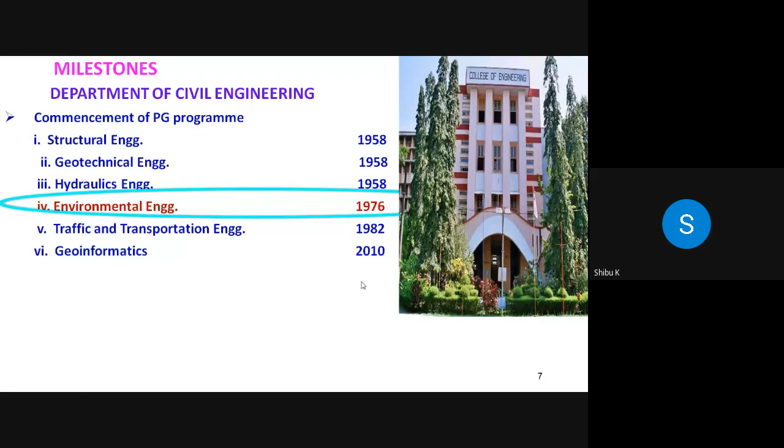These are the specializations we are having, and I belong to the Environmental Engineering stream.

So, preparation for PSC interview. Now let me tell you one thing - you have already proved your merit in the written examination, so maybe 100%, and the personality test or interview carries around 20% weightage.

As far as my knowledge is concerned, this is just a personality test - technical knowledge is already tested. Now what they are trying to do is concentrate maybe on current affairs, and most likely water authority and something related to environmental, mechanical and chemical engineering. It depends upon the subject expert what sort of questions he or she asks. Okay, I hope I am audible, and I am moving on.

So just going through Kerala Public Service Commission - this is Dr. M.R. Baiju, the Chairman of Kerala PSC. I wanted to introduce him because he was from our own college, he was a professor, and he's the chairman. There are 16 members in Kerala PSC.

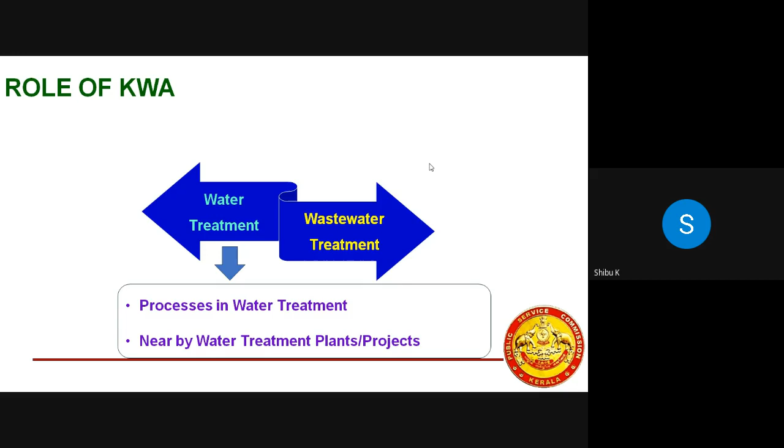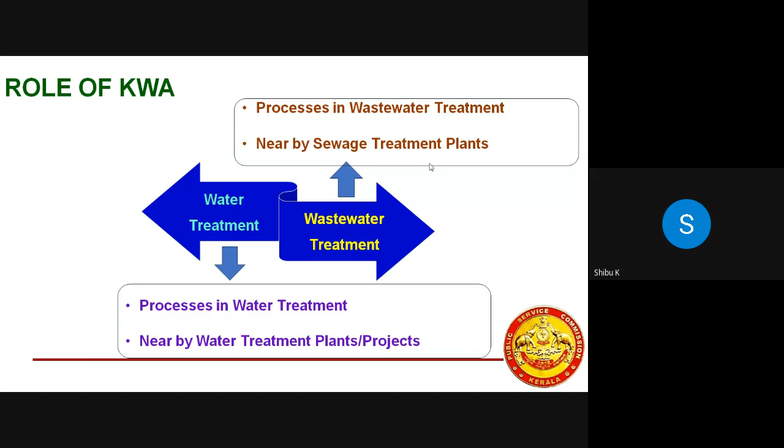Now let me come back. Kerala Water Authority, water treatment, the main processes, the nearby water treatment projects, or the wastewater treatment processes involved, which I will come to later: preliminary, primary, secondary, tertiary, etc., and nearby sewage treatment plants. And if there are any main projects of the water authority nearby, you should know about them, and also some central government projects: Jal Jeevan Mission, or maybe AMRUT. All these things can be a topic of discussion.

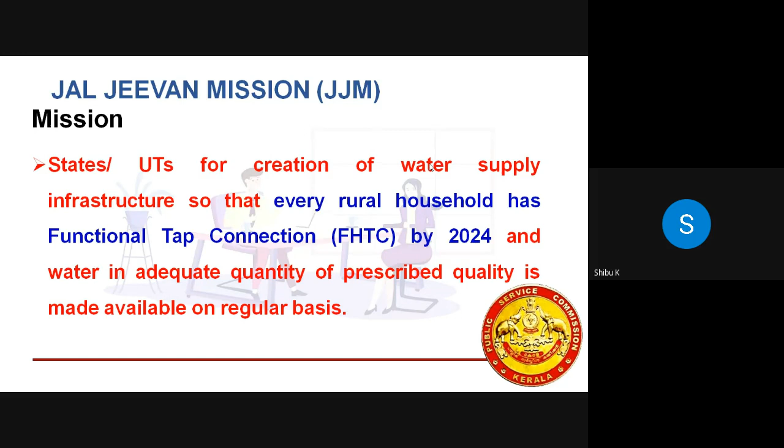So Jal Jeevan Mission: every rural household should have a drinking water supply. That is their vision, and to ensure drinking water on a long-term basis. And their objective is every rural household should have a functional tap connection by 2024. So that way, the mission is working forward. It is regarding water, that's why I included that.

And the AMRUT scheme, or Atal Mission for Rejuvenation and Urban Transformation. It's an initiative by the Government of India for urban areas, to provide basic civic amenities to the urban areas. We all know the basic amenities, roti, kapda, makan; water also comes into that, to improve the quality of life.

That is regarding the AMRUT scheme, and maybe they can ask who is the central minister, Ministry of Jal Shakti, Ministry of Water Resources. We have a couple of ministers of state also. The central minister is Gajendra Singh Shekhawat. Just check the current affairs whether this is correct or not.

Now they can ask you, say you are appearing for the interview for the post of engineer, what is the role of an engineer, especially in Kerala Water Authority? You may be a civil engineer, chemical engineer, or a mechanical engineer. Basically, I am from environment, so I'll be taking one example. So what is the role of an engineer as civil, chemical, mechanical?

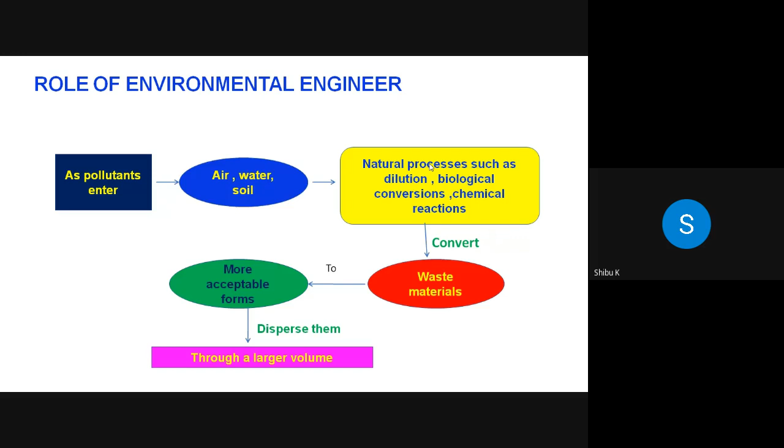If you take an environmental engineer, we know that a lot of pollutants are coming into our planet, either in the atmosphere, the hydrosphere or the lithosphere. Nature has a self-cleansing mechanism, which converts them into waste materials which are more acceptable. Nature itself is dispersing them. But now a huge volume of pollutants is entering, which is beyond the self-cleansing capacity. So can this natural process alone perform the cleanup? No. Treatment facilities are to be designed.

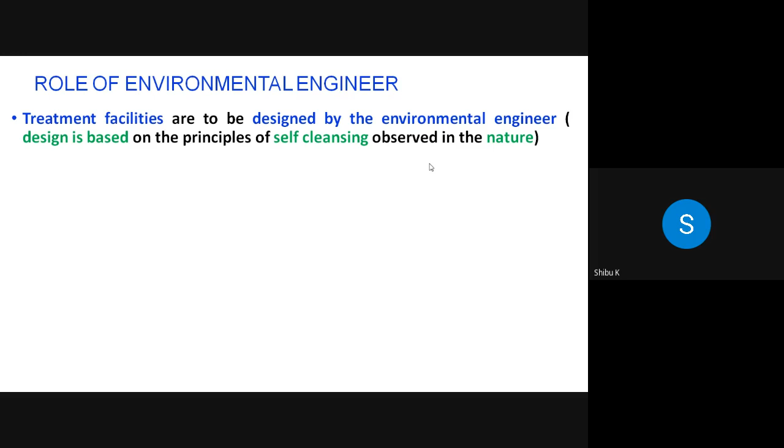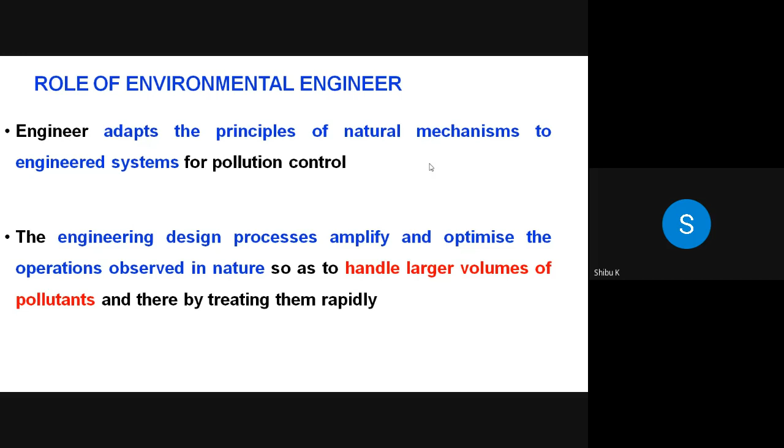So how do the treatment facilities have to be designed? Nature has a beautiful mechanism of converting waste into a less objectionable product, with less impact or less pollution. We take the same principle, but the rate at which these facilities work has to be high, because humans are creating more waste materials, and we cannot rely on the slow self-cleansing mechanism of our planet. That is why the engineer adapts processes for pollution control to handle the larger volume of pollutants.

One example is that we are creating tall stacks, as you can see from the presentation. Why? Because we have to disperse and dilute air pollutants, so by the time they reach the ground, the concentration is less. It is a simple example. Then wastewater treatment facilities, solid waste engineering, landfill. Filtration is the best example, because whenever rain happens, nature takes the water, filters it through sand, and it reaches the groundwater. The same mechanism we have adopted in the water treatment process. We are using a sand bed.

You might have studied about slow sand filter, rapid sand filter, pressure filter. There we take sand, so we are mimicking nature. We are taking all the mechanisms from nature, but the natural filtration rate is too slow. We have to adopt a faster filtration rate. That is why most water treatment plants are using rapid sand filters instead of slow sand filters.

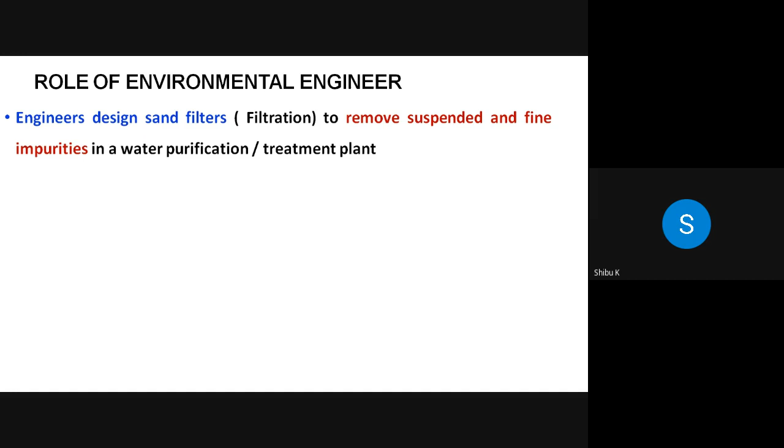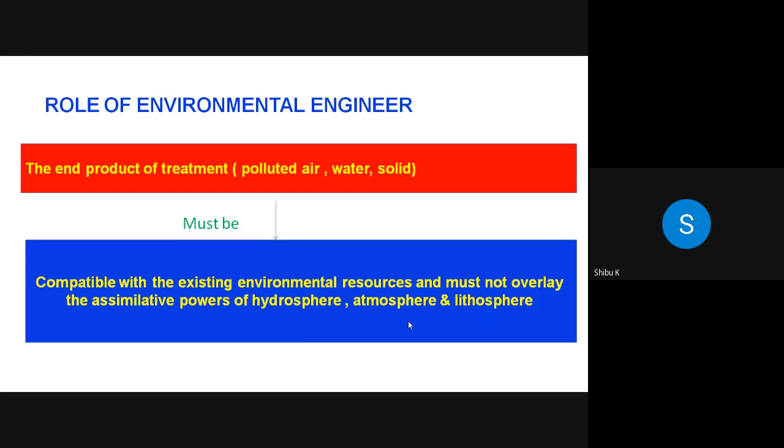So the main objective is to convert an objectionable waste material to a less objectionable form, and the end product should be compatible with the environment. I have already told you about current projects of the Water Authority in your native place. You should know about that.

And if the interview is on a special day, meaning a day of national or international importance, most of the time these PSC members ask, what is so special about today? So I have just added some days with any importance with respect to the environment, or water, or any discipline or field. I have listed a few: World Wetland Day, 2nd February.

You all know wetlands. In connection to wetlands, we have the Ramsar Convention. Wetlands are water bodies or marshy land of international importance. In India, we have around 75 wetlands, and in Kerala, we have 3 wetlands of international importance. These wetlands of international importance are called Ramsar sites.

Sasthamkotta is a Ramsar site in Kerala, in Kollam. Another Ramsar site is Ashtamudi Kayal, and we have Vembanad Kol, which is also a Ramsar site. These are very much required for our ecological restoration.

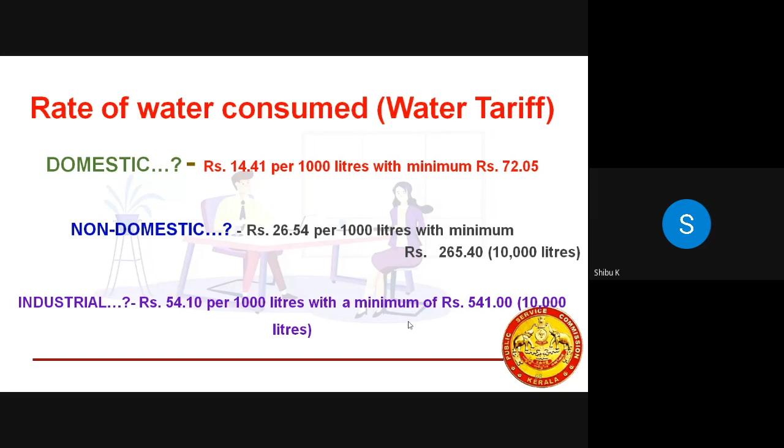Then comes the specification. As we all know, one of the main roles of Kerala Water Authority is to provide potable water. And when it comes to potable water, there is another water quality regarding the quality of water to be used in civil engineering construction. That is clearly mentioned in Indian specification IS 456. So please go through that also.

So the BIS specification regarding drinking water. The code is IS 10500:2012. You can just Google and you will get a PDF. You can go through the limits and all. These I have taken from the code itself.

Earlier, if you go to the textbook, it is physical parameters, chemical impurities, biological impurities, but it is not like that now. It is organoleptic and physical parameters, then substances which are excessive in chemical, and general parameters concerning substances undesirable. So you just go through the codal provision.

And let me tell you one particular thing about this BIS drinking water specification. There are two types of specification: acceptable limit and permissible limit. Acceptable limit means whether this limit can be accepted, and permissible limit means, if there is only one water source and no other water source, you can go up to this. So there are two limits, acceptable and permissible.

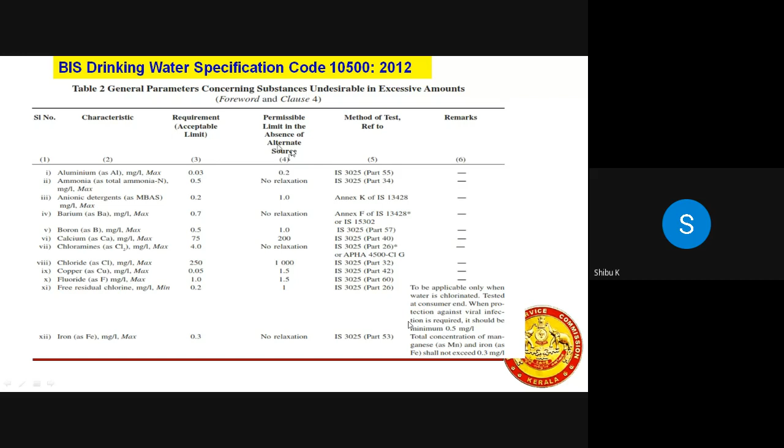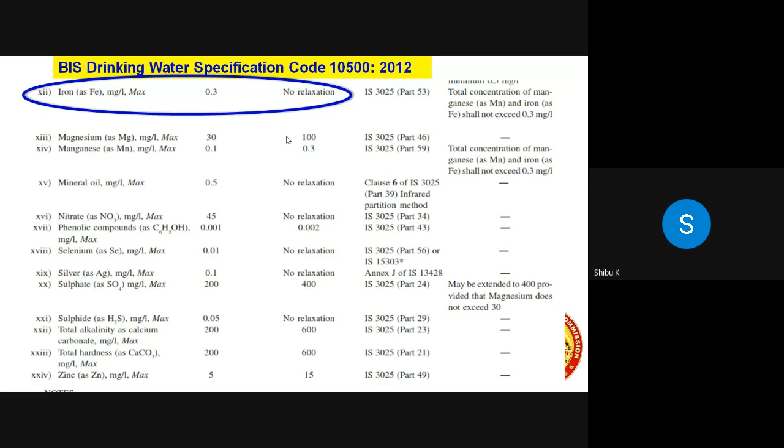Now, if you take the case of iron, it is given that the acceptable limit and permissible limit is 0.3 milligram per liter. As per this code, this is the limit. But I would say that has been changed already. According to the latest amendment, whatever additions or amendments come are automatically added to the existing code. So the acceptable limit and permissible limit is 1 actually.

Last time also I asked this question, and most of the candidates were mentioning it as 0.3, but it is not 0.3, it is 1 milligram per liter. In IS 10500:2012, there is one page: in 2015, it has been amended. So till 2015, it was 0.3, and now it is 1 milligram per liter. These are some tricky questions the subject expert may purposefully ask to check whether you are updated. I have just taken one example, that's all.

Am I audible? കേൾക്കുന്നൊക്കെ ഉണ്ടോ? Yes. കേൾക്കാം സർ, കേൾക്കാം.

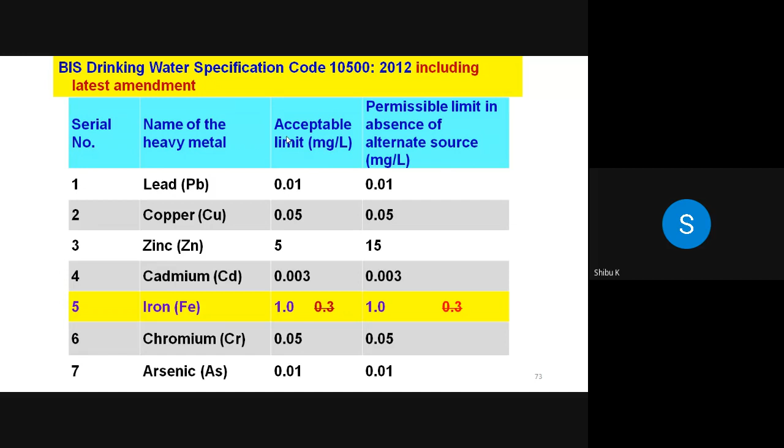Okay, fine. So that's regarding iron. I have just taken one example. When it comes to bacteriological counts, it should be nil in drinking water. Then there are some other IS codes for discharging effluent. Effluent in the sense, whenever wastewater is generated, this wastewater or the sewage can be discharged onto a nearby land, option number 1. Option number 2, onto a nearby water body; most commonly we do that. The third, onto a nearby public drain, and the fourth one is to the sea.

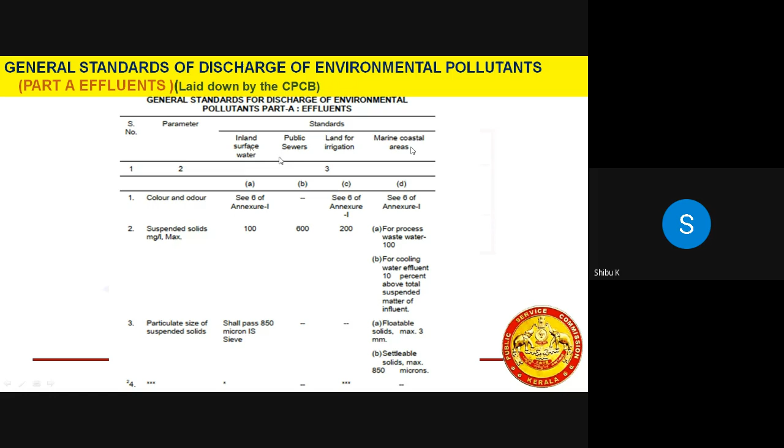So there are some general standards of discharge of pollutants laid down by the Central Pollution Control Board. I will just show you that. Here you can see when the pollutants are discharged onto a nearby water body, which is very common. Public sewer, we have another set of standards. Nearby land, another set of standards. And to the sea, we have another set. So just go through that.

I have just taken the screenshot from the PDF. You can just type in general standards of discharge of environmental pollutants. Part A, Part B, Part C, Part D. Four parts are there, and annexure 1 and annexure 2. I will just scroll through these slides. General standards of discharge of environmental pollutants, Part A, effluents. Four options are there. These are the limits.

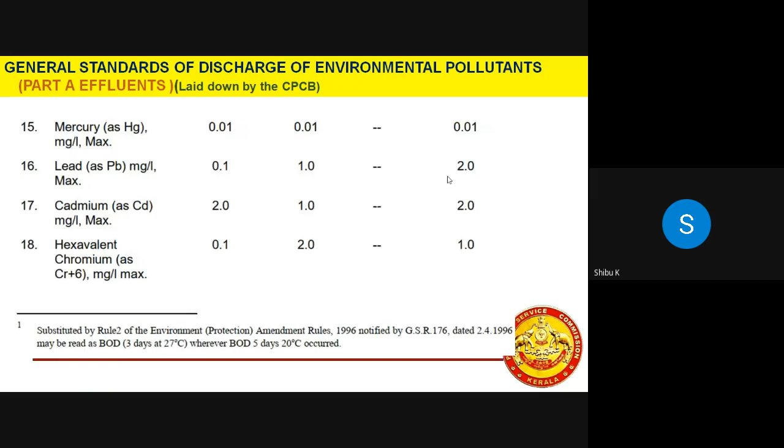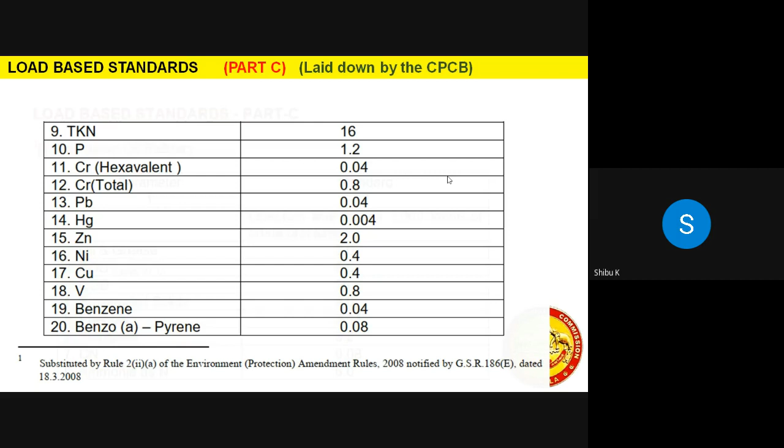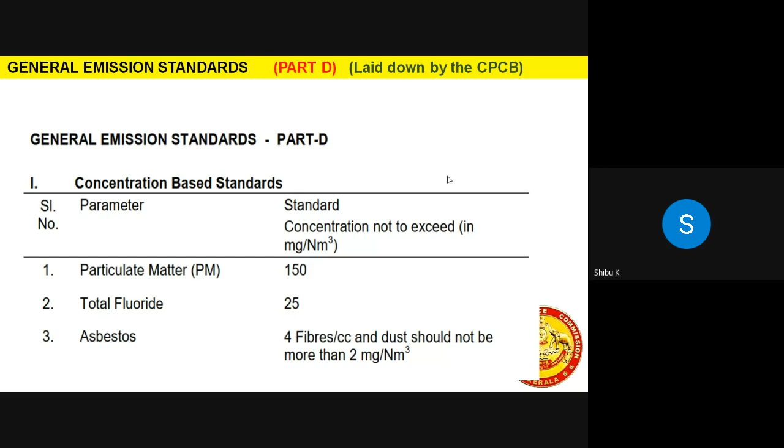Then comes wastewater generation standards, Part B: how much wastewater should be generated if an industry is producing this much finished product. That is also in the same PDF. And load-based standards are there, depending upon the wastewater load that comes in. Then the emission, how much air pollutants are emitted; there also we have general emission standards. Noise standards are also there.

Whenever noise standards are there, it should be specified at what distance the noise testing equipment should measure. What is the decibel for a normal conversation? The unit for measuring noise is decibel, and there are two scales: A scale as well as B scale. Just go through that. You will be able to know the normal decibel for a normal conversation, a jet or an aeroplane that is flying, maybe the threshold of pain for our eardrum. Like that, go through the noise standards.

You can just Google National Ambient Air Quality Standards 2009, NAAQS. The last part will be noise pollution; the first part will be regarding air pollution. And regarding air pollution, air pollution is now measured or expressed in our country in terms of air quality index. There are descriptor words for when the air quality index is between 0 and 50, 51 to 100, 101 to 150, like that it goes. Noise standards are also there. I'll just skip this because these are not necessary.

Now coming to questions related to environmental engineering, I will go on with the basic water treatment process, not in detail, because we have a time limit; before 9 I have to complete this. Wastewater treatment is there. So in environmental engineering, do focus on water treatment and wastewater treatment. Maybe types of pumps used in water supply, types of pipes used in water supply, and the valves used in water supply schemes can be asked.

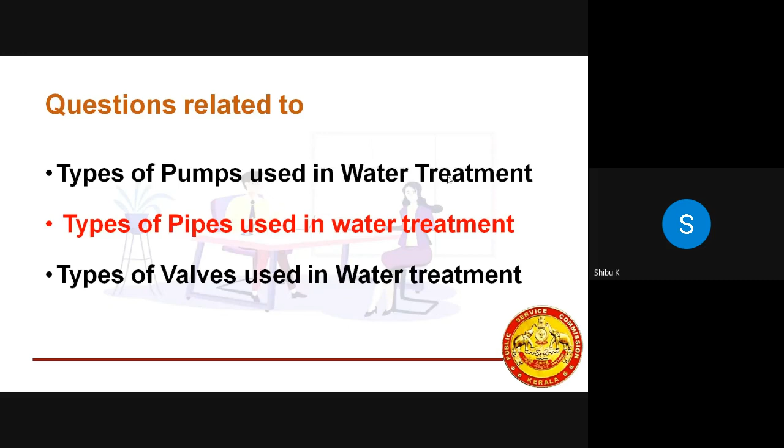When it comes to civil structural engineering, cement: what are the normal grades of cement available? What are the field tests and lab tests for cement? Then coming to concrete, all this depends upon the subject expert, because if I am in the panel, I will focus on environment and something general on civil, mechanical, or chemical. If one from structures comes, maybe 2 or 3 questions can be on structural engineering. So cement, concrete, RCC, PCC.

What is the quality of water that can be used for concrete? That is mentioned in IS 456, especially the limit of chloride content, the pH of water, which should not be acidic, and the silica content and sulfur content in aggregate and water. And what are the normal lab tests for concrete? You have the RCC beam, PCC beam, the cube test, and the mix; I will come to the mix later. Steel: the normal diameter to be used in columns, the minimum cover. Like that, questions related to structures can also be asked.

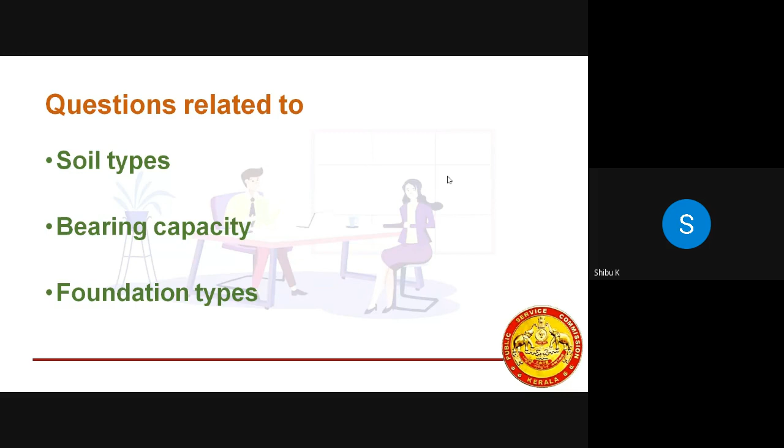Well foundation. Maybe what is so special about machine foundation? Because machine foundation is always something we design to take vibration also. So these types of questions also can be a topic of discussion. Coming to hydraulic structures, maybe our marvelous Idukki Dam. What makes it so special?

Hydraulic structures, aqueduct, the basics of fluid mechanics, Bernoulli's theorem, or maybe conservation of mass, conservation of momentum, or continuity equation. Then topics related to irrigation also can be, all depends. Because suppose I ask a candidate which is your specialization, somebody may say MTech hydraulics engineering, or maybe MTech machine design, or MTech propulsion engineering.

So something related to that, maybe from propulsion engineering, or maybe pollution, which sort of BS norms we are following, Bharat Stage norms. We were following Bharat Stage 4 norms. We skipped Bharat Stage 5 and jumped to Bharat Stage 6. Now what we are following is Bharat Stage 6, I think. So depending upon how you answer, the questions will also come in continuation, in line with the final answer you say.

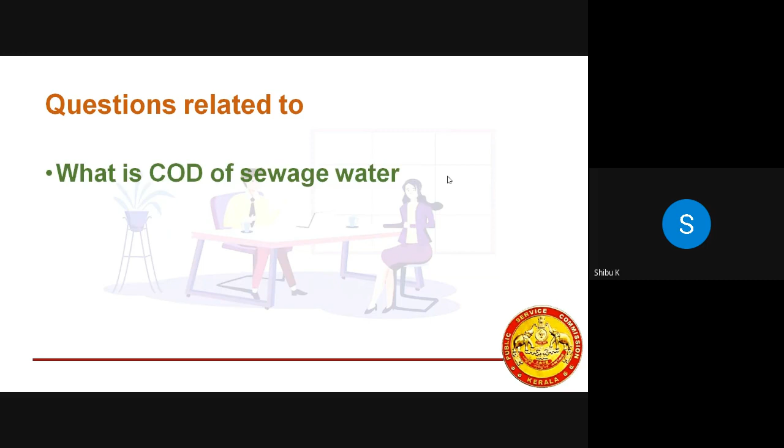What about COD, BOD? Somebody will be expanding BOD as biological oxygen demand, or somebody will be saying it as biochemical oxygen demand. What is the BOD of drinking water? It should be nil. What is the difference between COD and BOD? So like that also things can come.

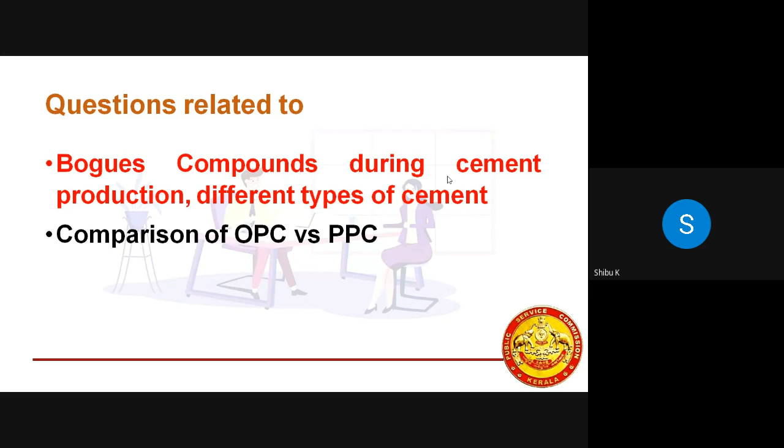Of course, regarding cement concrete, I think Biju sir has already taken the session for you, last month or a couple of months back. Field test of cement, I have already told you. What is the problem in using pumping in concrete works? Then unit weight of cement, or what is the weight of one bag of cement, like that they may ask. Nominal mix. I will just skip this.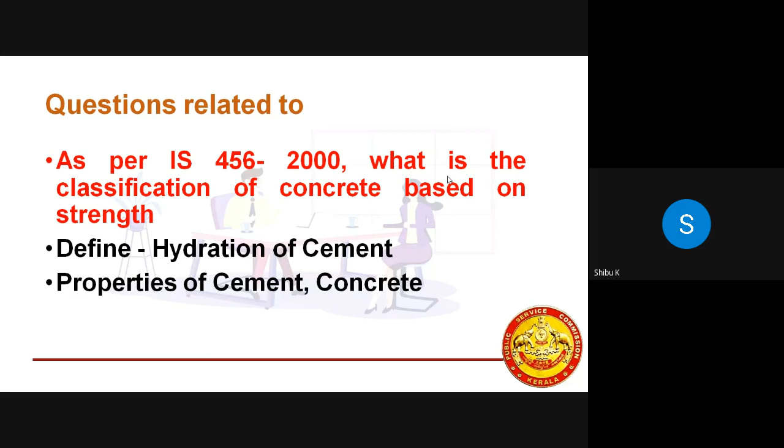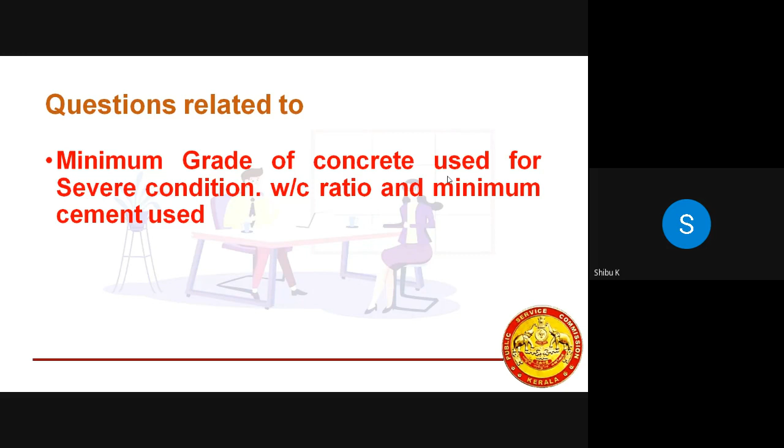These were something which was prepared by, I think, Biju sir. Hydration of cement, Bogue's compounds. Then water cement ratio. Regarding water cement ratio, Abrams' law comes in. Compressive strength and water cement ratio. Area, cube strength, one-way slab, two-way slab. Let's check this. A structural expert may be asking a lot of things like this.

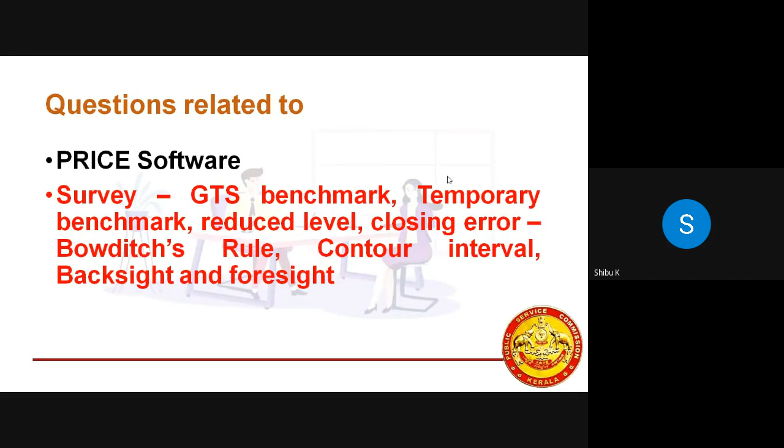Something regarding surveying or price software, which is used for estimation. You just go through, you will get it. Again, what we are following while discussing estimation, we are following the DSR rates, the Delhi Schedule of Rates. The year also should be known to you.

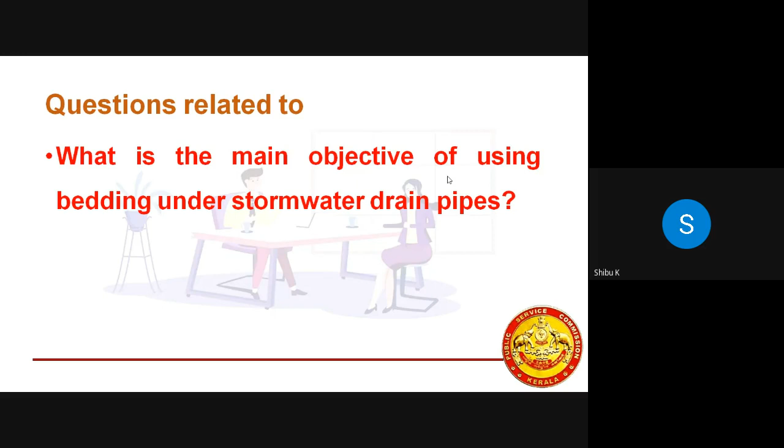Here there is a term known as biomining. So what do you mean by biomining? As per a recent report from Kerala's solid waste management issues, the Kerala government has come up with a report that 34 legacy dump sites are there. That means for years and years, people have been disposing their solid waste there. Till date, we have only one success story in completely converting a legacy dump site into pakka normal land.

That is in Kureepuzha, near the Ramsar site Ashtamudi, where there was a legacy dump site. In Brahmapuram also, biomining was being carried out, but it didn't reach the ultimate stage. Some issues happened in between, so I think they have started biomining again now.

Biomining means whatever solid waste has been accumulated in a particular legacy dump site should be properly treated, and the reusable, recyclable materials should be taken out and disposed of properly. Finally, the rejects, maybe 1 to 2%, also have to be taken care of, and the land has to be completely converted back to its previous state. So that is what biomining is.

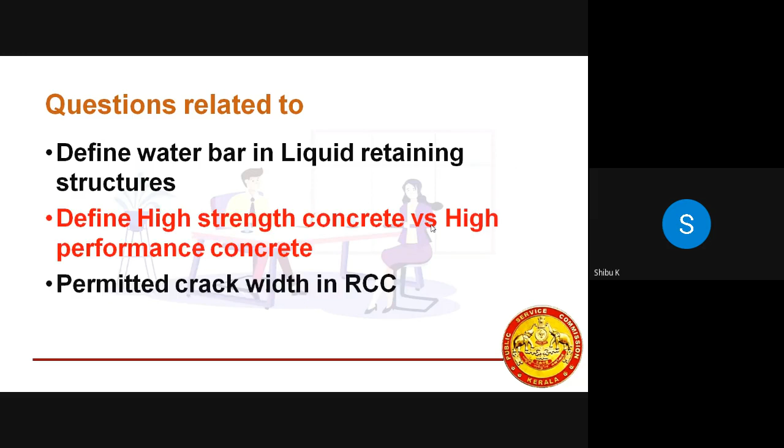And then, just a minute. Let me go to the water treatment processes as well.

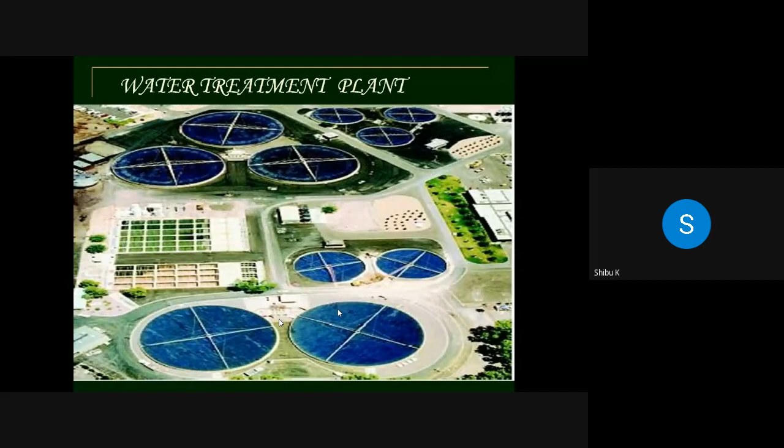Regarding Kerala Water Authority, they are more concentrating on the water treatment system as well as the wastewater treatment system. This is the layout of a typical water supply scheme. There is a source - I come from Kollam, my native place. We have Shasthamkotta Lake, but in Trivandrum we have Aruvikkara.

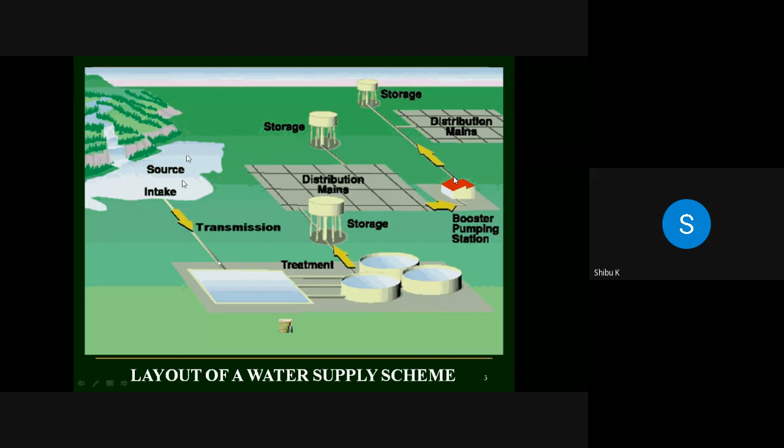So there is an intake structure. It will be taken by means of a transmission system to a water treatment plant. Some process goes on, and after that it will be taken to storage tanks. From there, gravity flow will be there, and it will finally reach the household. Maybe booster pumping stations are required in between.

That is in general. The various water treatment processes involved are: you take the raw water, screening is there - screening means floating matters are removed. Then comes plain sedimentation, which I will explain in the forthcoming slides. So raw water screening, then plain sedimentation, then sedimentation aided with the help of some chemicals - what are the normal chemicals used as coagulants, they may ask.

Then comes filtration, with the help of sand bed, and now new materials are also being tried - anthracite or some sort of material with high filtration capacity is also being tried by the water authority. Then disinfection, aeration, and softening. But in most water treatment plants in Kerala, it all starts from aeration. Aeration removes bad smell, bad odor, and completely oxygenates the water.

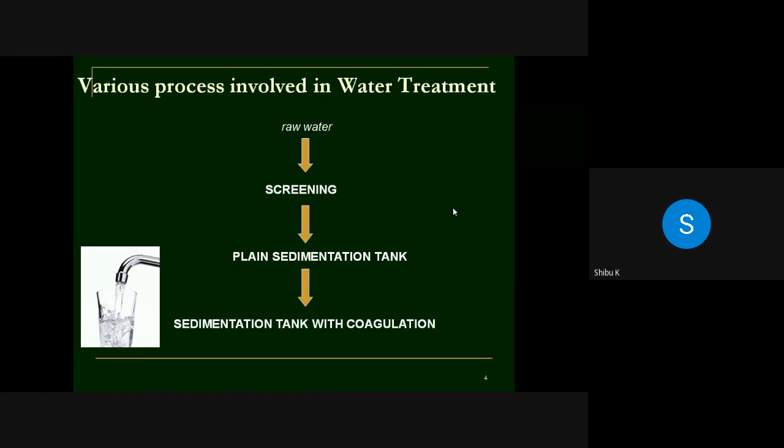In regular treatment process, we say like this: screening, plain sedimentation, sedimentation with coagulation, filtration, disinfection, aeration, softening, and some miscellaneous treatment methods like fluoridation, defluoridation, or liming. Finally, the treated water comes. Miscellaneous treatment methods are fluoridation, removal of color and taste, removal of iron and manganese.

Iron and manganese removal is needed because manganese is usually found in combination with iron, and iron is very common in Kerala. There are some pockets where fluoride concentration is high, especially in Alappuzha and Palakkad. Also, recarbonation, liming, and desalination are miscellaneous methods.

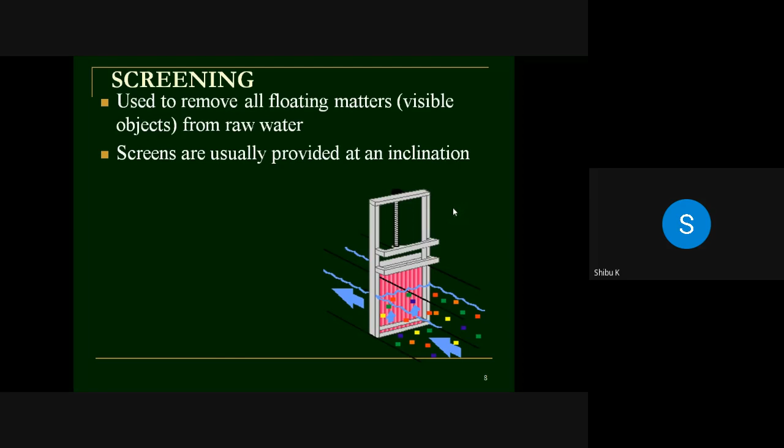Screening, as you can see from the picture, removes floating matter - you can see a bar screen here. Then comes sedimentation - plain sedimentation, then sedimentation with coagulation. Plain sedimentation means under gravity, particles whose specific gravity is greater than 1 settle down. Specific gravity of water is 1, so particles with specific gravity greater than 1, especially inorganic particles, get removed.

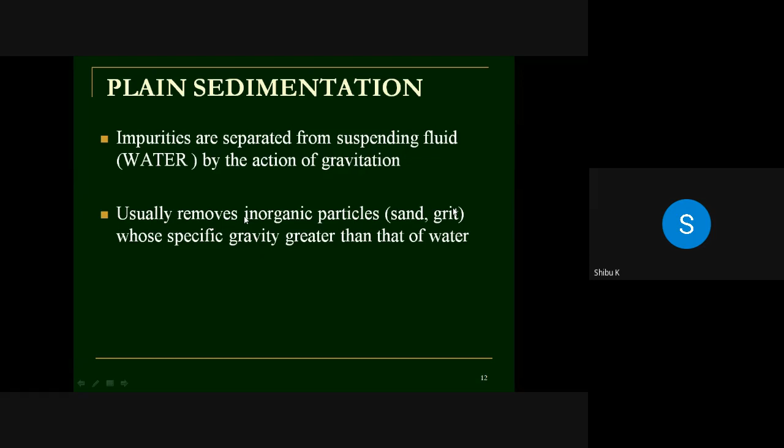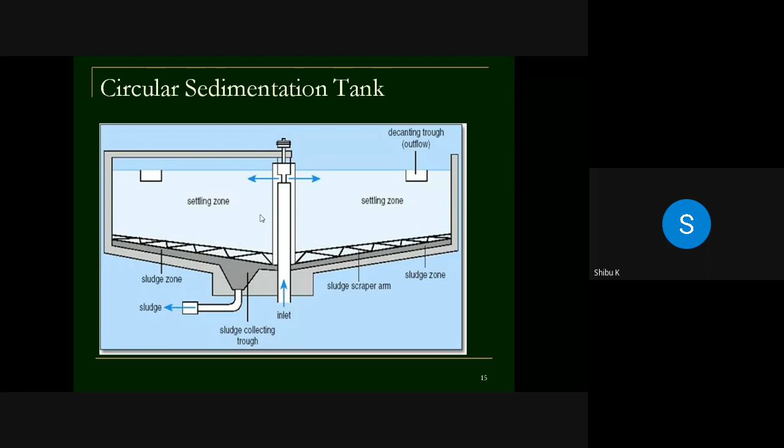We have rectangular sedimentation tanks, which are not common now. Now we have a clariflocculator - circular sedimentation tanks are there, clariflocculators. You might have studied all this preparing for your written examination. Then we add some chemicals - normally they may ask what are the commonly used coagulants. Alum. What is the problem with alum?

Whether it works effectively in the acidic range, or what about chlorinated copperas, alum? What is alum chemically? I used to ask what is the chemical formula for alum. Most of you don't know - it's aluminum Al2(SO4)3, 18H2O. That is actually alum. So ferrous salt is there, a combination like chlorinated copperas is there.

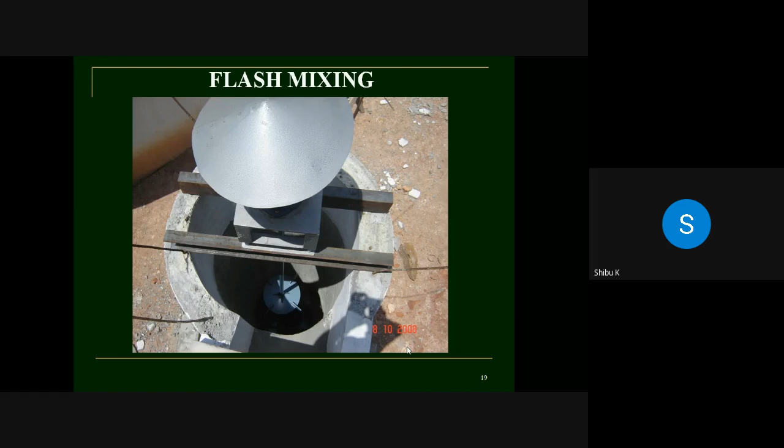When you add this chemical with water, there should be a flash mixer. So this is actually a flash mixer. Then of course you can see the clariflocculator - this one is in the construction stage.

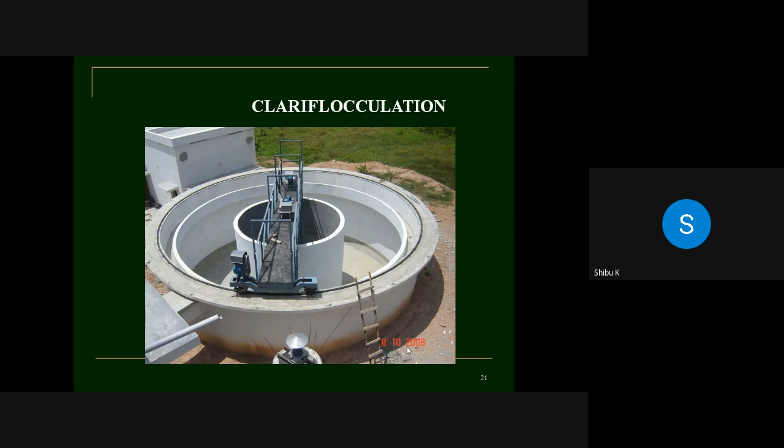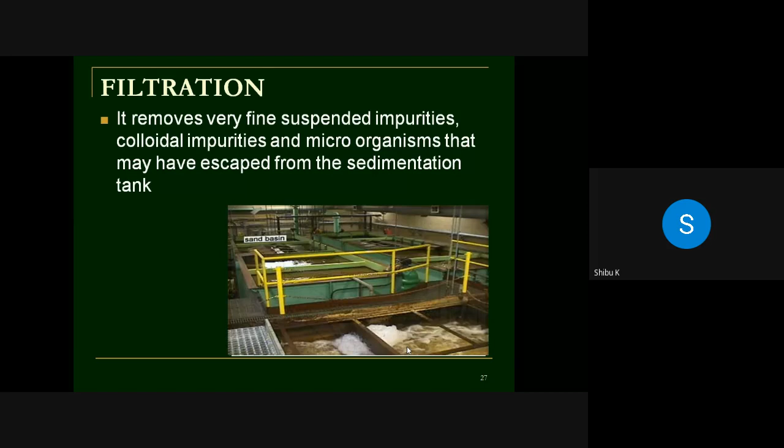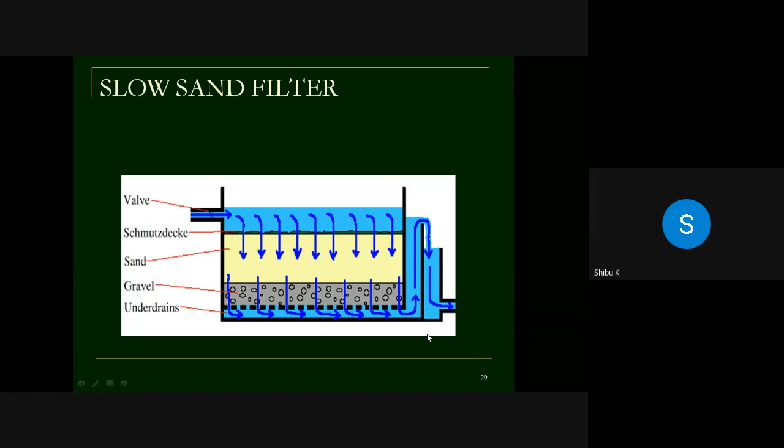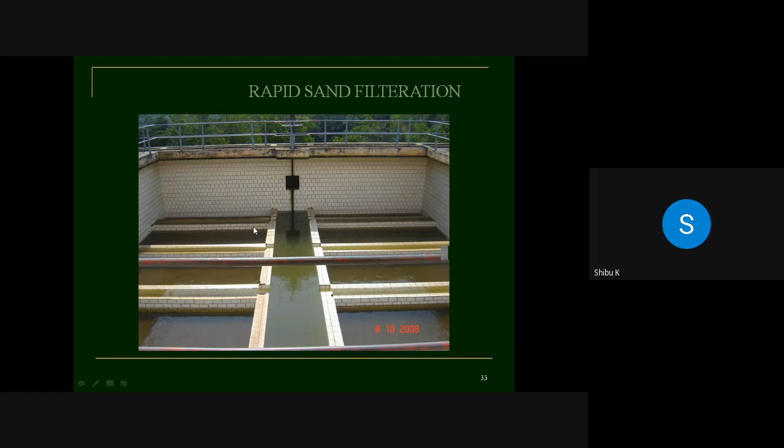And the rapid sand filter is most common nowadays - you can see over here, this is the bed, these are the beds. So for the slow sand filter, I will just skip this.

Then comes disinfection. Chlorination is commonly carried out because it is very cheap. But in foreign countries, when you are chlorinating the water, trihalomethanes - some carcinogens - can come into picture. But India is a developing country, we cannot afford other treatment mechanisms, so a reasonable amount of disinfection is done.

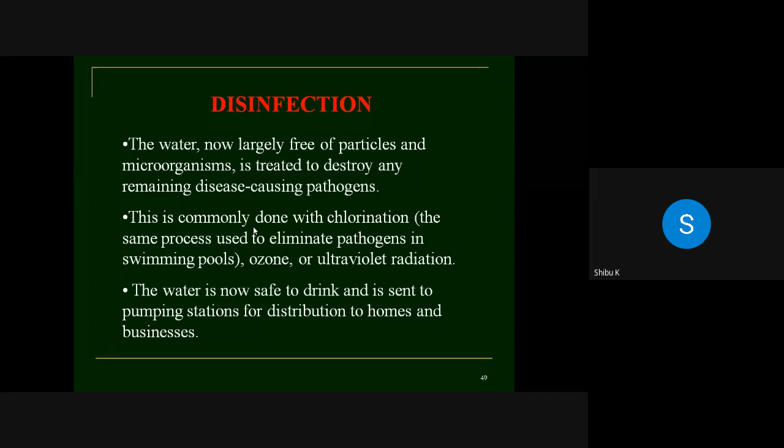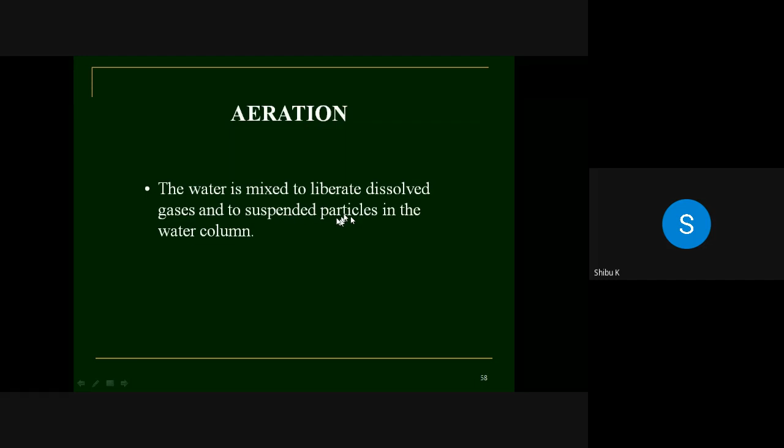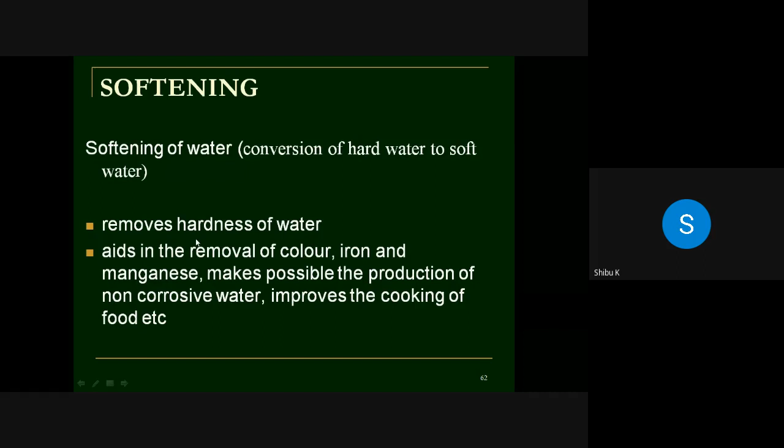Then removal of hardness - what is softening of water? Removal of hardness - what are the types of hardness? Temporary and permanent. What is temporary due to? What is permanent due to? So those also can be discussed. Lime soda process is there, base exchange and demineralization process is there.

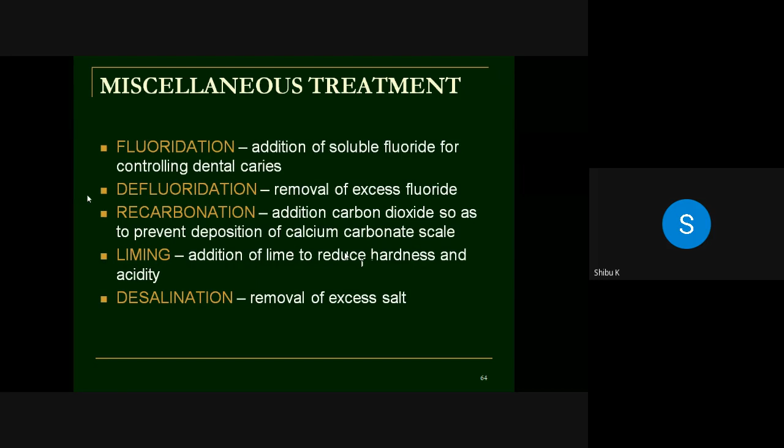Then comes miscellaneous treatments, because whenever fluoride comes, it is a double-edged sword - kudiyalum koranyalum - that is a main problem. So fluoride concentration should be within the limit. What is the range of fluoride concentration in drinking water? Then liming, desalination, recarbonation - all these are miscellaneous treatment methods. Recarbonation, desalination, liming - so that is regarding water treatment.

And wastewater treatment, I have another slide for wastewater treatment also. Why I have concentrated more on this is because mainly Kerala Water Authority are working in this particular field.

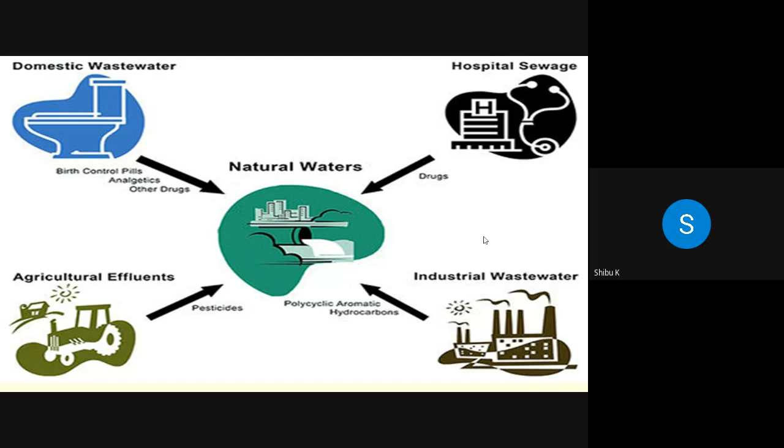So coming to wastewater, there can be a lot of discharges from various fields. Whenever we are taking water for drinking, it comes to a water treatment plant, then a water distribution system, and we use the water. Once we use the water, it is estimated that around 75 to 85% - normally we take it as 80% - of the water we use converts into wastewater, and this wastewater we call sewage. So it goes to a sewage treatment plant, and is discharged either to a water body, or to land, or to a public sewer, or to a sea. That is how wastewater is generated.

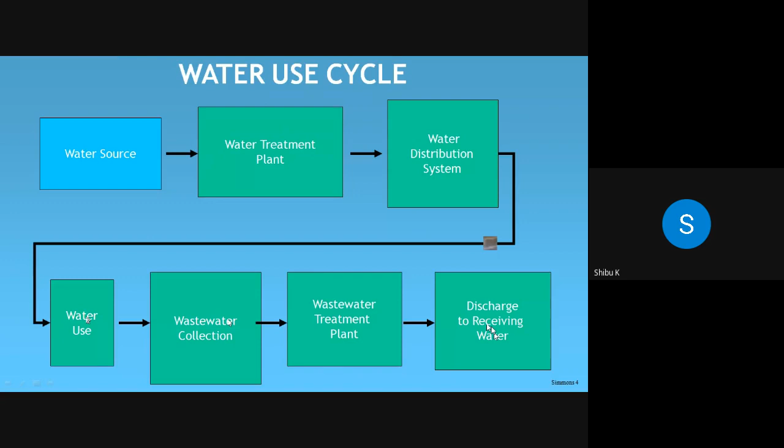So when I talk about operations, there are unit operations and processes in wastewater treatment, because we have to remove the contaminants or impurities in wastewater by physical, chemical, or biological means. Physical unit operations are there - physical means we use some force, to add or remove something. Chemical means we use some chemical. Biological means we use some microorganisms, either aerobic or anaerobic.

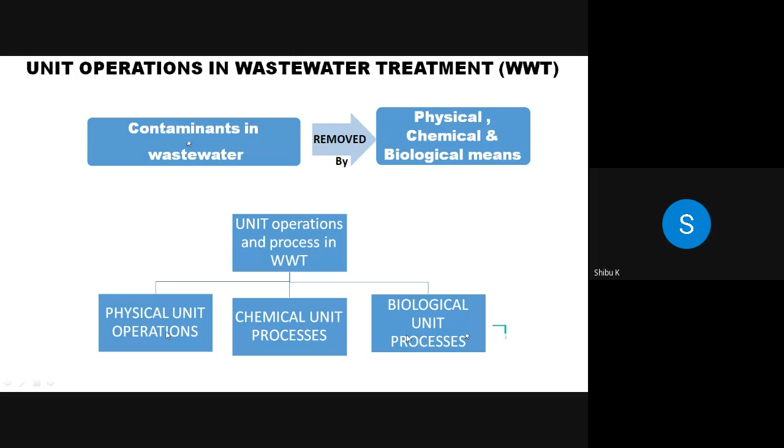Coming to physical unit operations - here contaminants are removed by some physical force. In the screen, material gets removed - that is one example, used to remove floating matter. So screening is a physical unit operation. Of course, sedimentation, plain sedimentation - under gravity, we are using a force. And flotation.

Again, those floating materials or froth will be coming to the top. Oil and grease are removed by flotation. Filtration again removes the dirt or impurities, either at the top layer or in between the pores. So most of the physical unit operations use a physical force to remove the suspended or floating matter.

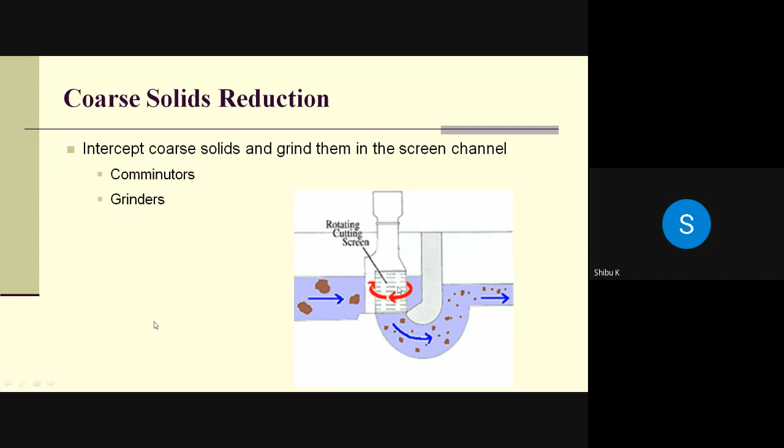Screening, plain sedimentation, flotation, filtration. You can see the screen here, it is removing the large particles. Comminutors are there for shredding. Shredding systems are there to reduce the size. Grit removal, again under gravity - aerated grit chamber, horizontal flow grit chambers are there.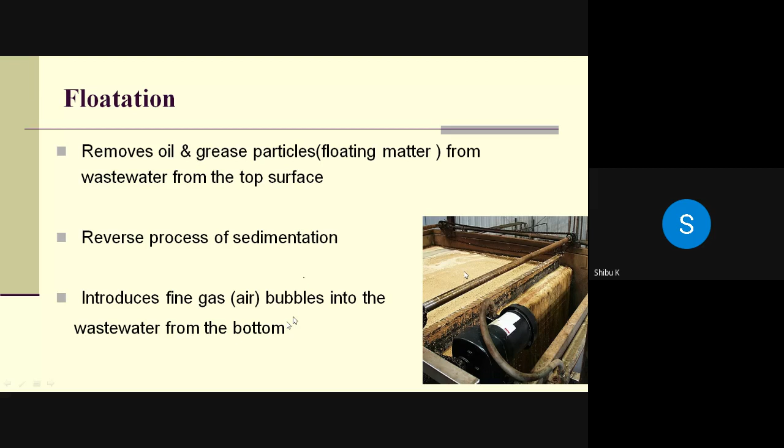Flotation unit, because here the removal is from the top. Oil and grease particles come to the top because they are lighter - the specific gravity is around 0.8, 0.9, while specific gravity of water is 1. So we introduce fine bubbles from the bottom, which takes everything to the top. Then gravity separation, plain sedimentation, as I already told you.

Then comes chemical unit processes. In chemical unit processes, we use chemicals - precipitation and coagulation is an example. This is an additive process. The physical unit operations were a subtractive process - we were removing those things from the system. This is an additive process - we are adding chemicals, and contaminants in wastewater are removed or converted by adding chemicals.

You add alum - aluminum sulfate, 18H2O. The aluminum flocs, aluminum hydroxide, aluminum sulfate, Al2(SO4)3 18H2O. Once it reacts with the impurities, aluminum hydroxide will capture most of the impurities, becomes heavy, and it will settle down. So contaminants in wastewater are removed or converted by adding chemicals as a result of chemical reaction.

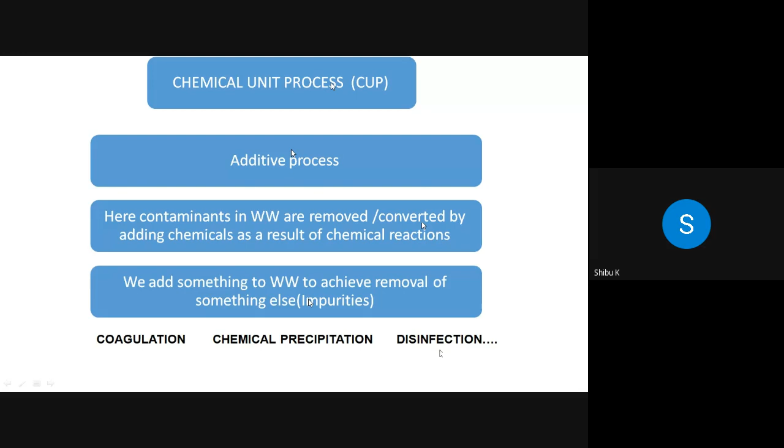We add to wastewater coagulation, chemical precipitation, disinfection - all these are nothing but chemical unit processes which come in wastewater treatment. So in chemical unit process, coagulation is there, chemical precipitation is there.

Then comes biological unit process. In biological unit process, we take the help of microorganisms. So in biological unit processes, we use microorganisms for decomposing the organic matter. What happens is that for microorganisms, our waste materials are the food. So it can work either in aerobic conditions or anaerobic conditions.

The biological unit processes are used to remove biodegradable organic matter, because when you talk about biodegradable organic matter, what happened to the inorganic material? Inorganic material is sand, silt, clay - all these have already been removed in the previous operations. So to remove biodegradable organic matter, aerobic and anaerobic conditions are there.

In aerobic conditions, the organic matter or waste material, which is very unstable, will be decomposed by the microorganism to harmless or stable inorganic matter, water. They produce heat and additional bacteria. And this bacteria - because in any process, whatever microbes you provide should be very active microorganisms, young microorganisms, and the conditions should also be conducive for them. So this is regarding aerobic decomposition.

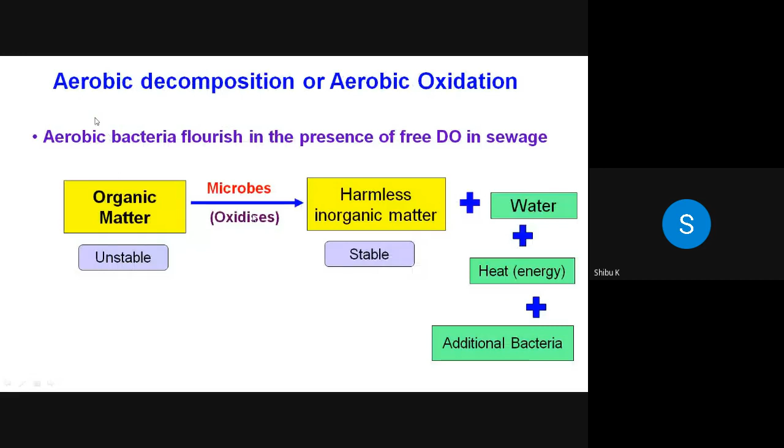In aerobic decomposition, free oxygen is available - we are giving free oxygen, free DO is available. But in anaerobic decomposition, bounded oxygen, dissolved oxygen is there, because nitrate means NO3 - their bounded oxygen is there. No free oxygen is available.

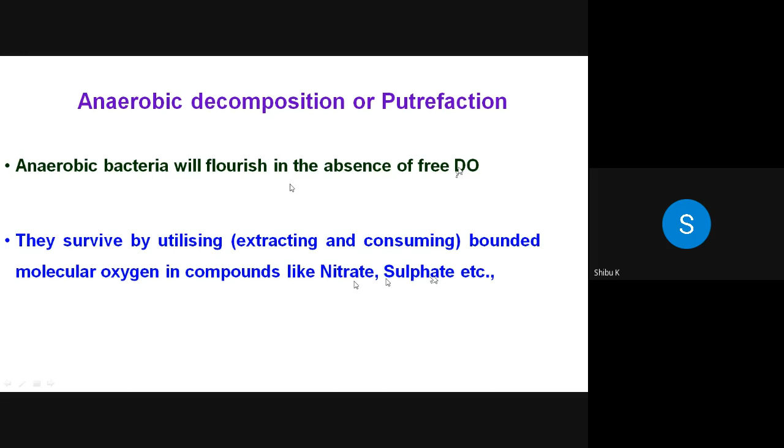Sulfate, SO4 - they are also bounded oxygen, along with sulfur there is a molecular oxygen. That is known as bounded oxygen, the bounded molecular oxygen is there. So both require oxygen - one requires free oxygen, here they use bounded oxygen, bounded dissolved oxygen. So in anaerobic decomposition, the microbes will be converting this organic matter into hydrogen sulfide, because oxygen is already used, so oxygen will not be there as a final product. So hydrogen sulfide - rotten egg smell, ammonia, methane, etc. will be there.

And carbonaceous matter will be converted to methane, nitrogenous to ammonia, sulfur to hydrogen sulfide. So that is why obnoxious odor will come. These are some examples of anaerobic bacteria. So various operations, physical unit operations, chemical unit processes, biological unit processes are carried out in wastewater treatment to attain the desired effluent quality.

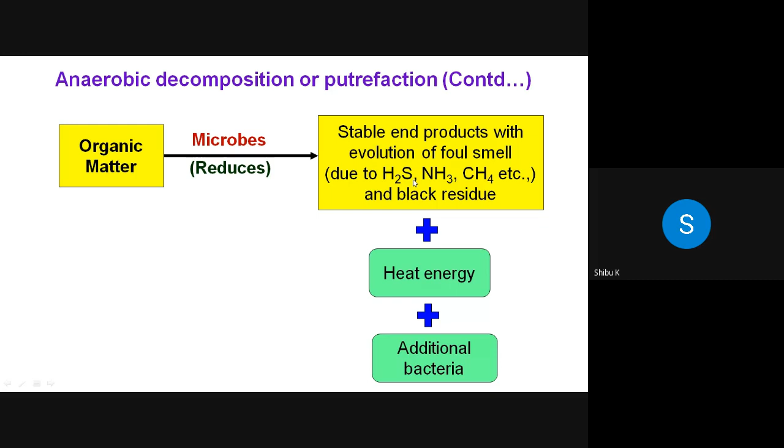Now, the last part of my presentation: in this wastewater treatment, I talked about aerobic and anaerobic. But in general, if you take the process, there are 4 techniques: preliminary, primary, secondary, and tertiary. So conventional treatment techniques are preliminary treatment, primary treatment, secondary treatment. Of course, tertiary treatment is there. Then, after all these things, sludge will be formed. So what to do with the sludge? That is also a big problem nowadays.

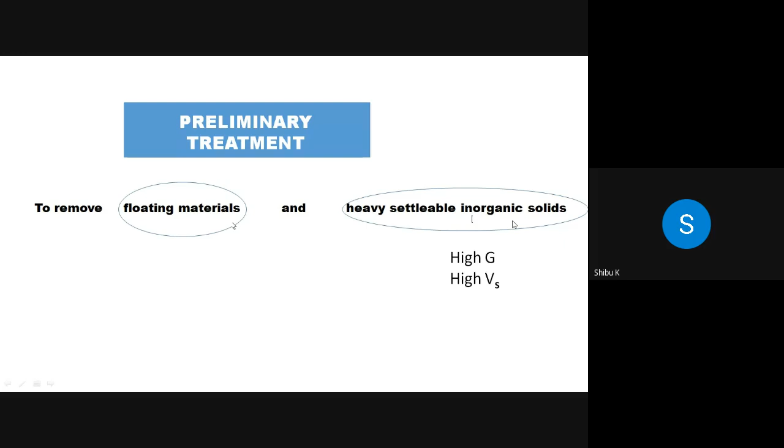So going to preliminary treatment. Preliminary treatment is to remove floating matters and heavy settleable inorganic solids. Inorganic means sand particles, silt particles, etc. So in preliminary treatment we use screens. We use grit chambers and detritus tanks to remove the grit. For shredding, we use comminutors. For removing oil and grease, we use skimming tanks and flotation units.

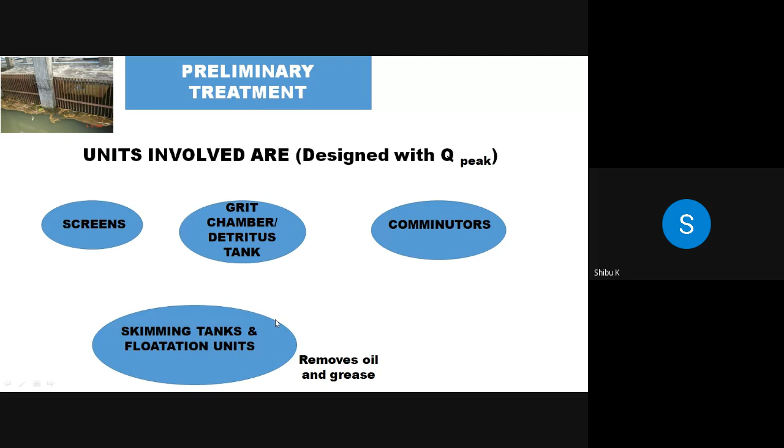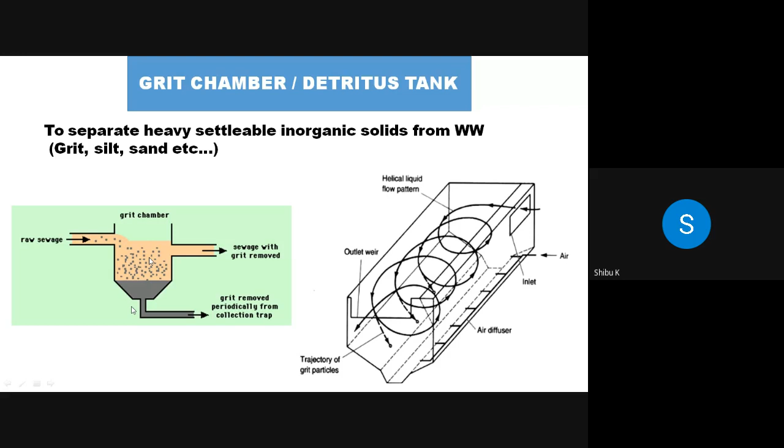Screens, as I have already told you. Grit chambers: the horizontal flow grit chamber is there, the aerated grit chamber is there. Comminutors, shredding systems are there, and units to remove oil and grease. Okay, so that is regarding preliminary treatment.

Now comes primary treatment. Once preliminary treatment is done, these inorganic solids have gone. So in primary treatment, we have sedimentation tanks. But for a small community, a small household or a small residential colony, the septic tank and Imhoff tank come. But for a normal or centralized wastewater treatment system, the septic tank and Imhoff tank are not part of that. Both are for local treatment systems.

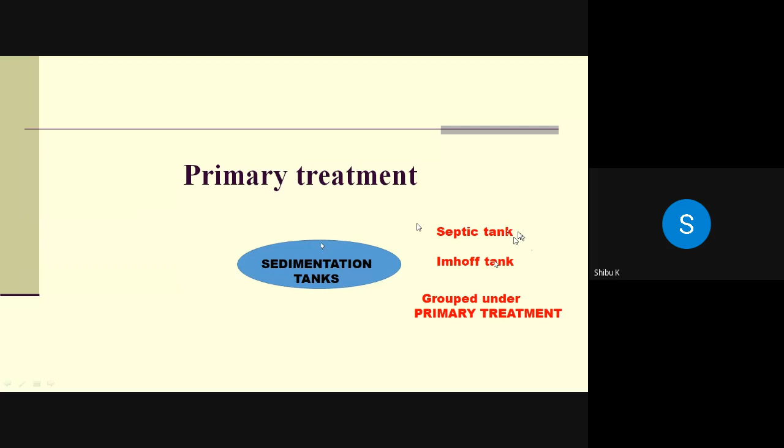A septic tank may be for an individual house or a hostel or a hotel. An Imhoff tank, just like that, may be for a small residential colony, 4 or 5 residences. They don't come under a centralized system, but they're grouped under primary treatment. So sedimentation tanks are there in primary treatment to remove suspended organic solids. The effluent, whatever liquid comes to the top, goes to the next stage of treatment. Sludge collects at the bottom and is taken to a sludge digestion tank.

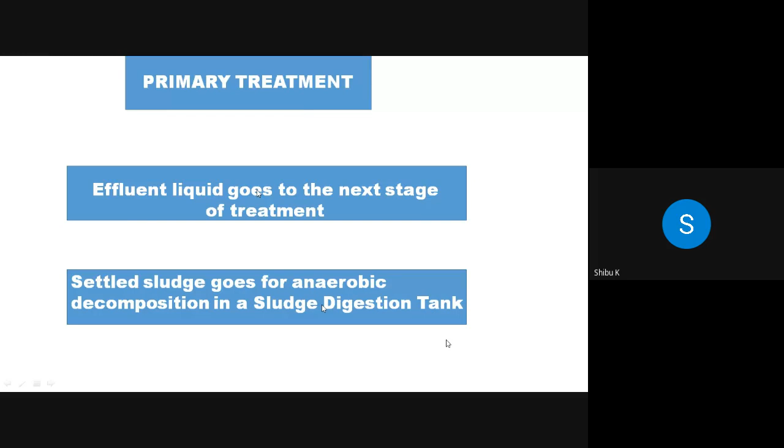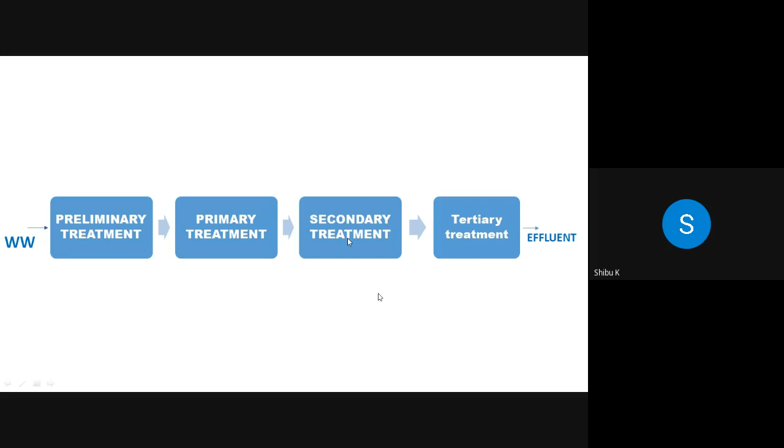Then comes secondary treatment. This time I have just taken the basic things; we can go in detail, but I have just taken the basics. In secondary treatment, as I already told you, we use microorganisms. They can work in the aerobic condition, with free dissolved oxygen, or in the anaerobic condition, with bound oxygen. So in secondary treatment, to remove soluble and colloidal organic matter, microorganisms convert this organic matter into gas and cell tissues.

The gases depend upon aerobic or anaerobic. Aerobic means carbon dioxide, water, and sulfur dioxide will be there. But if it is anaerobic, instead of carbon dioxide, methane will be there. Instead of sulfur dioxide, hydrogen sulfide will be there. And more microorganisms will be formed.

So in a biological system, you can see preliminary treatment, then primary treatment. After primary treatment, living organisms are doing the job. So no shock load should come into this unit. If a shock load comes, the microorganisms will be killed. Since biological systems are very sensitive to flow, we must not input shock loads. So there will be an equalization chamber.

So in secondary treatment, aerobic systems and anaerobic systems are there. Aerobic systems: the trickling filter, with a media, activated sludge, a suspended system, and aerated lagoons. Anaerobic: anaerobic lagoons, anaerobic sludge digestion, the anaerobic contact process, and anaerobic filters.

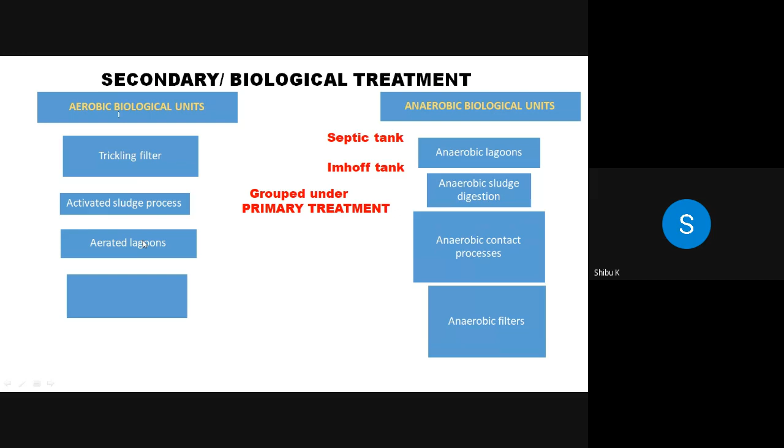So based upon the techniques used to remove contaminants, attached growth system. A trickling filter is the best example. Attached growth system. So what do you mean by attached growth system?

I don't know whether this much detail is required for you, because from whatever experience I have in the Public Service Commission, your resume is the key and your answers are the key. Okay, let me complete this.

So attached growth system, here microbes attach onto a solid medium, accumulate and convert organic matter into gases and cell tissues. Trickling filters, rotating biological contactors. Suspended means everything remains in suspension. Activated sludge process. Activated sludge process is more common. It's more common.

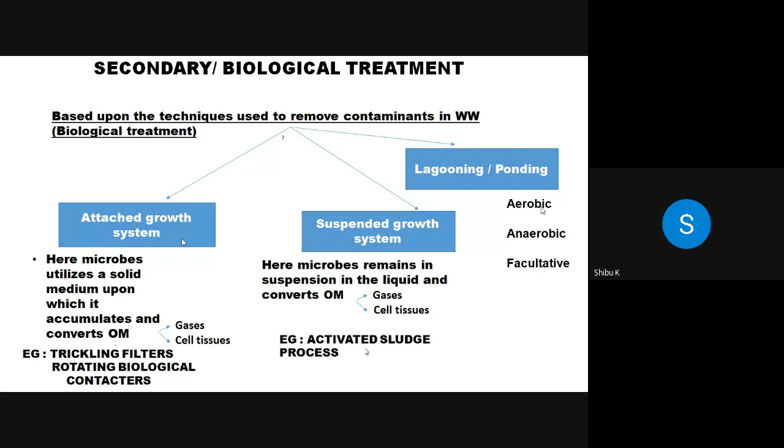Then of course, if you are having lots of land... this is not applicable or feasible in Kerala. But if you go to Tamil Nadu, if you want to travel from one village to another, you may have to travel 100 or 200 kilometers. But in Kerala, it is nothing like that. There is nothing truly like a rural area. What we call Kerala is a rural-urban continuum. So lagooning is there, aerobic, anaerobic and facultative. So that is regarding that one.

I think I have just given you an idea, and if you have any doubt, you can mail me, or this is my WhatsApp number also. I have given you just a brief description of some of the topics, because I am working in the environmental engineering field, and Kerala Water Authority is mostly associated with water supply, wastewater and all those things. So this is what I have to tell you about the two things.

What I will try to focus on is that when you're writing your biodata, be honest, write it very legibly, and don't make any spelling mistake. You should honestly complete those things, because certainly questions will come from there. I have already given you some examples. Current affairs regarding the minister, especially Water Authority, the MD, the chairman. That hierarchical setup you should know.

And on the day your interview is scheduled, or the previous day or the next day, you should know if there is any day of international or national importance. And don't bother much about the interview. You should be very confident, and if you don't know the answer, you stop there. The discussion stops there. Because if we ask some questions and the candidate is not able to answer, what we'll try to do is that